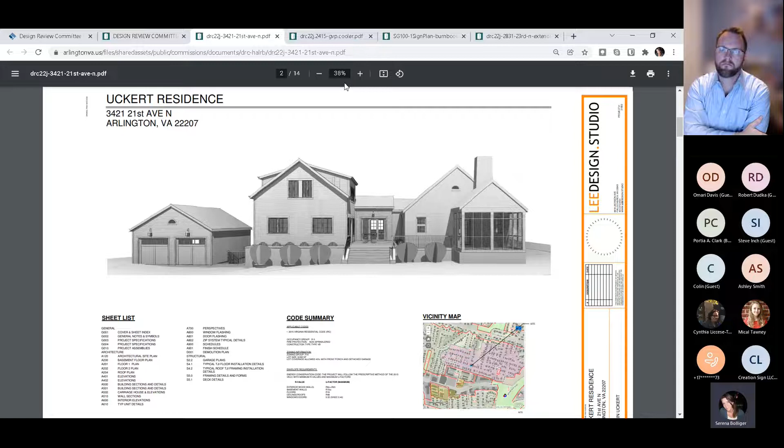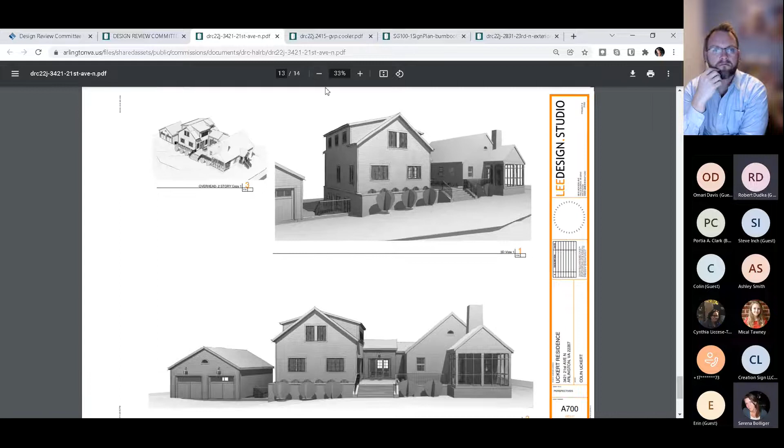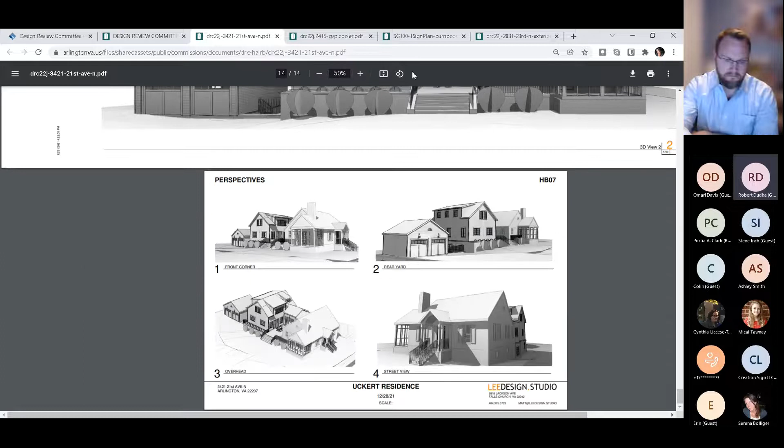And the applicant kindly submitted some additional renderings for me so we could see additional views from the street. Serena, can I ask something? Was this seen last month? It was, yes. Okay, so there's been discussion that I didn't participate in. So I guess maybe you can summarize briefly for me what happened last month.

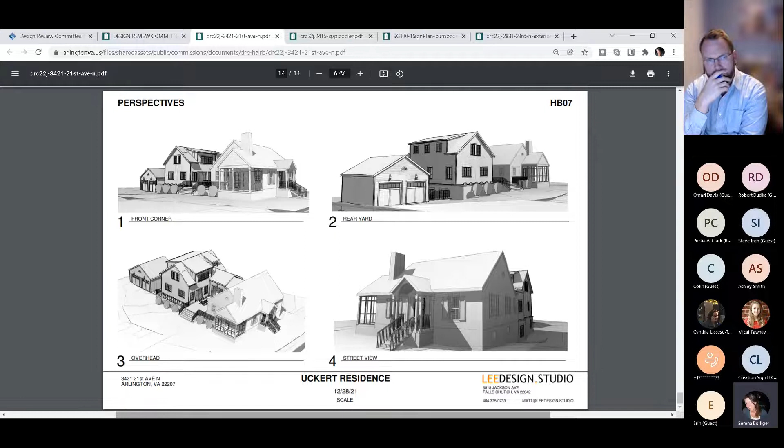In addition to your report. Yes, so this project has come in front of us more than once, and the applicant has been really receptive to feedback. They lowered the roof more than once, created this hyphen between the two buildings to separate the new from the old, and made sure that the roof line was not above the roof line of the historic property. Can someone mute themselves just so there's no echo? Perfect, thank you so much. And they added this garage in the rear and reduced the roof line twice, put in a half-moon window to mimic the half-moon window in the property, and also set it back so it would be a secondary building to the main structure. The staff report found the materials to be appropriate and the changes made over time to the property to be appropriate.

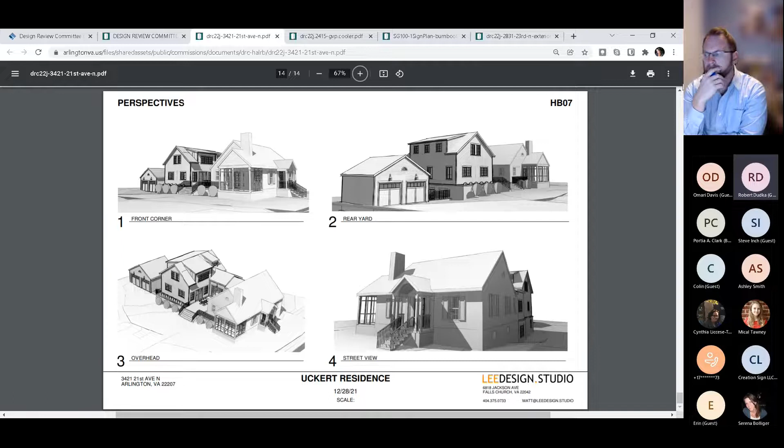As an addition to the historic structure. Do you have any additional questions for me? Is there anything I didn't cover? It was quite generic. Can you go back to where you scrolled through the drawings to the ones that showed the changes? Sure, let me.

So these are the plans for the garage. Right. And I can take us to the site plan so you can see how the size has been reduced. There was those ones where the colored, I assume that showed the, keep going.

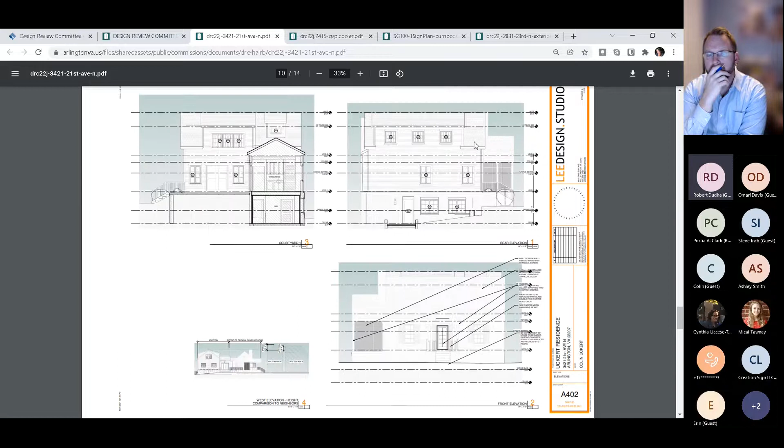So those are the parts of the original house that have been modified or demolished? Yeah, so that's an existing addition that is going to be removed. It's not part of the original house. It was an addition, I think in the 80s.

Do you want me to keep going through the drawings? No, I just wanted to see this sheet. Okay, that's it. Great, thank you.

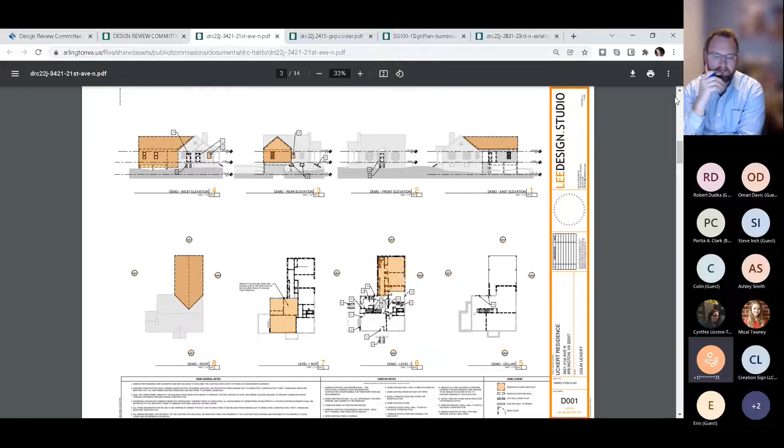I think some members of the board would have liked to have seen the garage move back further than that, but it was originally set by the applicant at the same setback line as the main addition to the house, the 1.5 story with a basement.

So I think 2 foot 4 could be a bit more, but I have one comment that I think would help. There's been railings used on the patio between the original house and the addition, and that is fine there. I think that's fairly light.

But I think it would perhaps emphasize the setback of the garage from the addition if, instead of a railing fence there and steps down, you change that railing to a picket fence, which would be fairly traditional and would read stronger than the light metal railing. So I think that would be one suggestion.

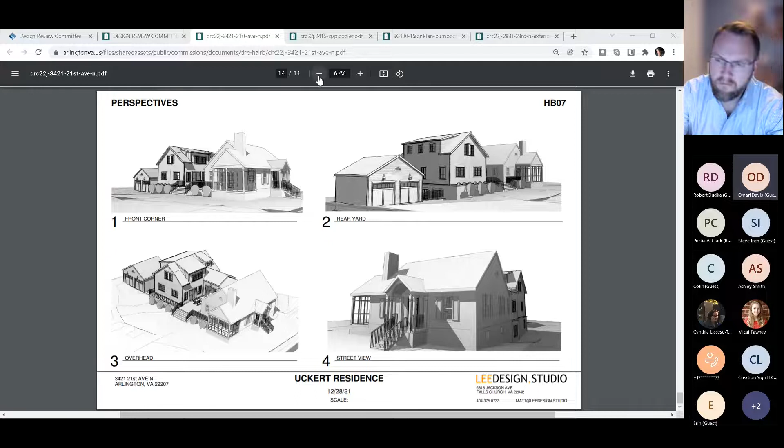I do see that there is some differentiation there now, but the way it's done, I almost wish the hyphen could... I'm not quite sure how to. Serena, could you advance to... yeah, there we go. So the hyphen kind of pops up above the gable coming from the existing house, and I kind of want it almost to be the case where the hyphen would be sort of the minor element in this elevation, such that you have the addition on one side and the existing house on the other side. The hyphen almost wants to be sort of the minor thing connecting these two major elements.

Again, it's really not a deal breaker from my point of view of the project at all, but that was something Commissioner Wenchel had mentioned. I thought that was a very good comment last time, to make that hyphen a more minor element, but that's my only comment on design. Again, I want to thank the applicant for their work thus far on the project.

So this is Robert. Thanks, Omari and Andy.

Did this go to the full board last month? Yes. And was the board generally supportive? Yes, they were very happy with the addition, including Joan, who's a neighbor. She's about two houses down Lincoln, since this is on the corner.

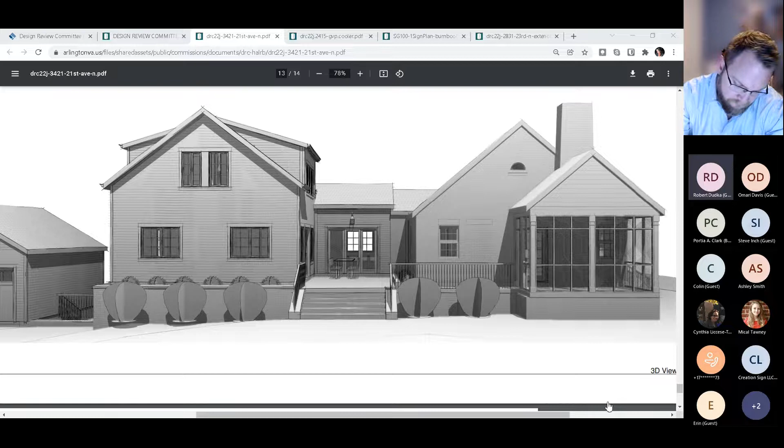So I think on the whole it's worth doing it this way. I also realize there's almost no yard on this property, so you can't push the garage any further back. It would have been great if there was somewhere to push the garage so it's not quite so far up front, but I know that can't happen.

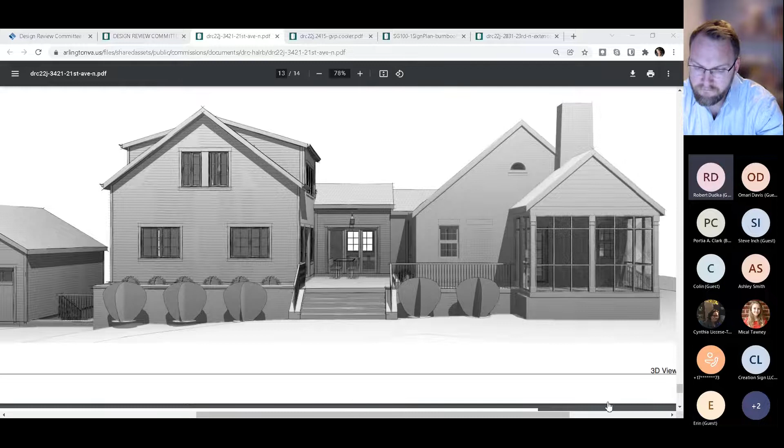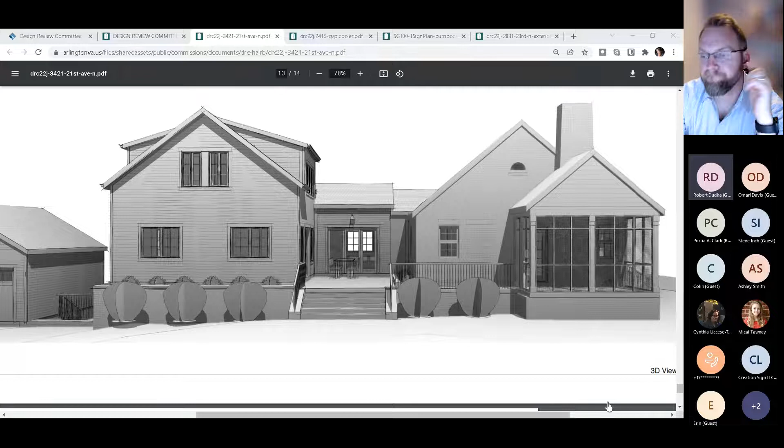I share Omari's concern about the link—if anything, you'd almost want it to go the other direction, where the link on the addition side is lower than on the house side. But I understand why it is that way. That's not a huge consideration for me.

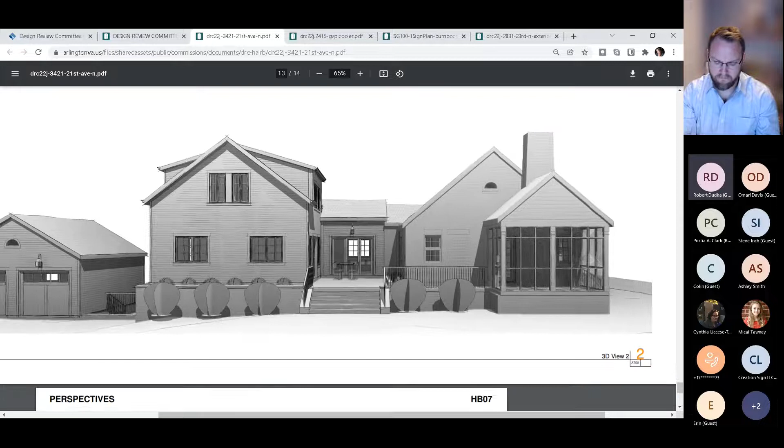Otherwise, I think the applicant has done a very good job with this, and I'd certainly support it.

Serena, is the intent to go to the board for final approval this month? Yes.

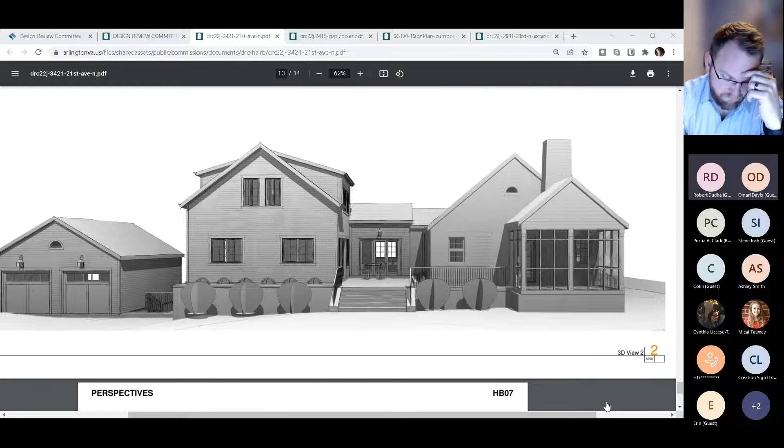So I guess the question is whether it's possible—I've now heard there were two of us who talked about the rail. I don't know if we all agree about that, but it seems like a relatively simple thing to change. I don't know if the applicant would be amenable to that or not, but if that was changed, I think I'd be okay with this.

Hey Matt, it's Colin. Do you want to address that, or would you like me to respond? I raised my hand to try to be polite, but Serena just didn't want to talk to me, I guess. So when I show my screen, I can see nothing. Sorry, all good. I'm very offended, Serena, but we'll let it pass this time.

Yeah, Colin, absolutely. So we've got two railings in this view. I agree if the one on the left, between the addition house and the garage, wanted to be more of a picket fence feel, that doesn't bother us. I think the one on the house, we're looking for some transparency there. Is that the one you're talking about, Mr. Dudka? Yeah, that's the one I'm talking about. The one between the garage and the addition should also be a wooden fence.

But the metal railing tends to—I know it does happen on houses of this vintage—but it probably wouldn't happen on a Sears house, is my sense. So I think I'd rather see it as a wood rail. What does the rest of the DRC think? I guess the other comment was actually about the link between the garage and the addition, not about the rail up on the house proper. So what do you other two guys think?

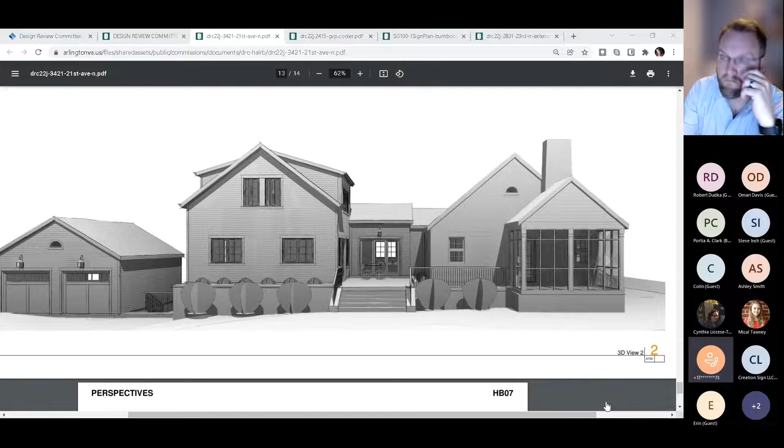Well, if I could jump in, Andy here. I think we hadn't really commented on the rail by the patio, between the addition and the original Sears house, which is raised up a bit. I agree with you that the Sears house would not normally have a metal rail. That was something somebody added later, sold to a homeowner—it wasn't part of the Sears built kit.

I think that's a reasonable request. It would give you a nice feel. I think the only argument for the metal railing is really the transparency, that you can see through it. My thought, if I can interject, is that a wood rail is going to require a post every 4 to 6 feet. It's going to be a lot chunkier, and I don't think it's going to be as attractive. It's more maintenance for our client. I think the metal rail is going to be something thinner, lighter, and the neighborhood's going to enjoy more than a chunky, pressure-treated, painted 2x4 rail.

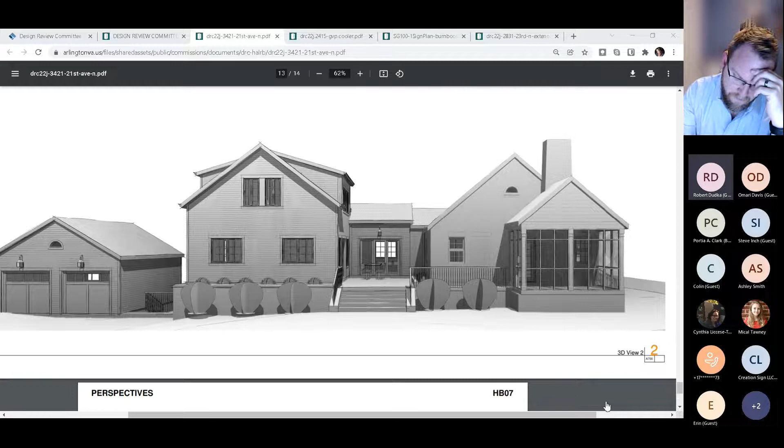No, it wouldn't be a 2x4 rail. It would be a Maywood approved rail, which is the more traditional rail, which is in the guidelines. There are details how to do that rail in the guidelines, and you see it all over Maywood. It's fairly typical.

Understood. So Omari, what do you think? I'm kind of willing to be on board with you, Nanny, on this one. I definitely hear the argument that the transparency of the metal makes it better for the viewer, so to speak. But I think as a uniformity thing with the neighbors and with Maywood in general, and with the Sears house, the wood would be more appropriate. I see both arguments, but I would fall to the side of having the wood railing, both between the garage and also up on the patio there as well.

Understood. That doesn't bother me. Can I ask for a clarification? So I thought the previous comments on the area between the garage and the addition were to have a picket fence. Is that the direction we're being guided, or do you want the same wooden railing there that you're now suggesting on the patio?

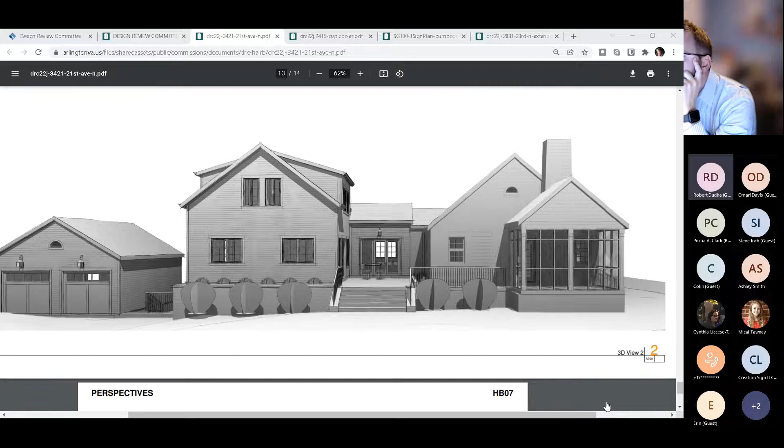No, the fence between the garage and the addition is a fence, and I think as long as you do one of the standard fence designs that exists in the guidelines, you're good to go on that, at least in my opinion. In fact, technically you don't need our approval for the specific fence you put in there, as long as it's one of the guideline approved fences, because essentially they're already approved. But the rail, between the original house and the addition, clearly does need our approval.

So I don't know how the whole board feels about this. You could always come in with an alternate, two alternates, one with the metal rail, one with the wood rail, and see what the board is willing to allow. We're 3 people out of however many we are now, 13 or so.

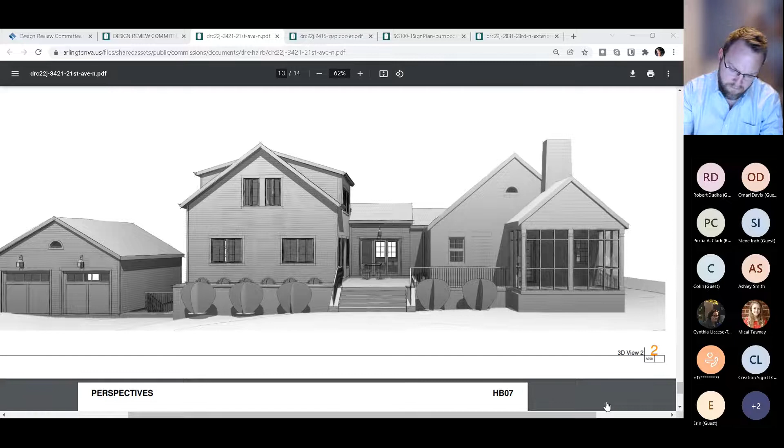My sense, just to summarize this, is that everybody's pretty happy with this, and we should kind of move it on to the board. I think we're just talking about the rail at this point, and you could easily show an option with the wood rail and one with the metal rail. If you can make your case to the board, and the board is okay with the metal rail, then I'm not going to be upset about that.

Okay, well, I appreciate the guidance. That's very helpful. Thank you. So does anybody else have any other comments, or are we good to move this forward to the board?

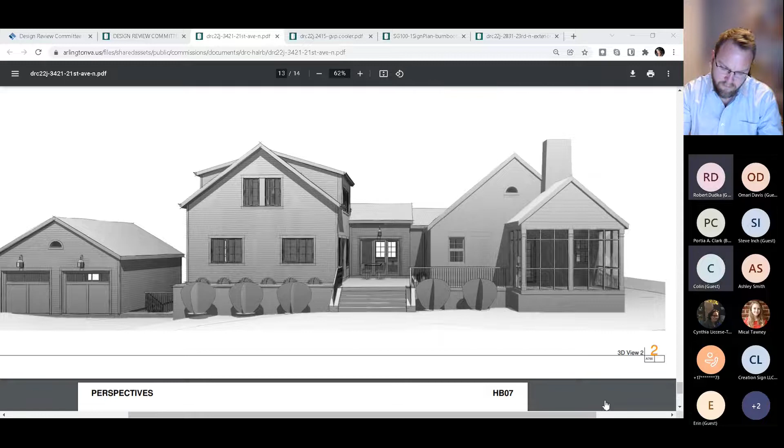I'm good to move it forward to the board. So you'd like to put this on the discussion agenda, Robert? Well, the board has already seen this. The only issue is the rail, we could couch it that they've done what the board has asked, and we're really just have this one minor issue, which we're doing as a favor to the applicant, because if the board is okay with the metal, then so be it. So I would suggest that it goes to discussion, but not to reopen. If all the other elements have already been discussed, then it should be limited to the changes that were made since the last board meeting.

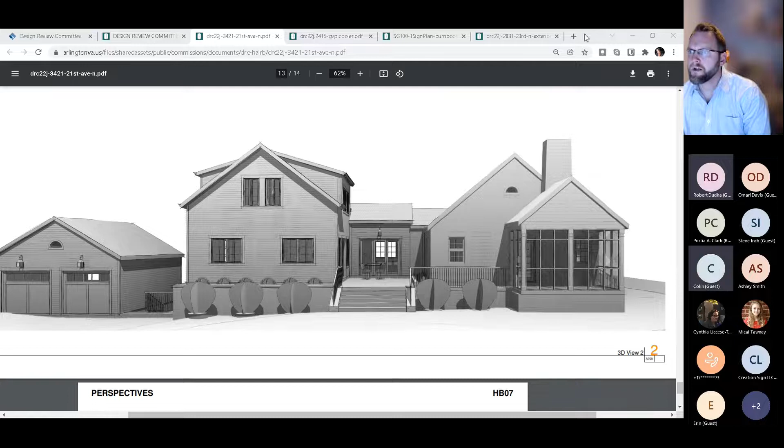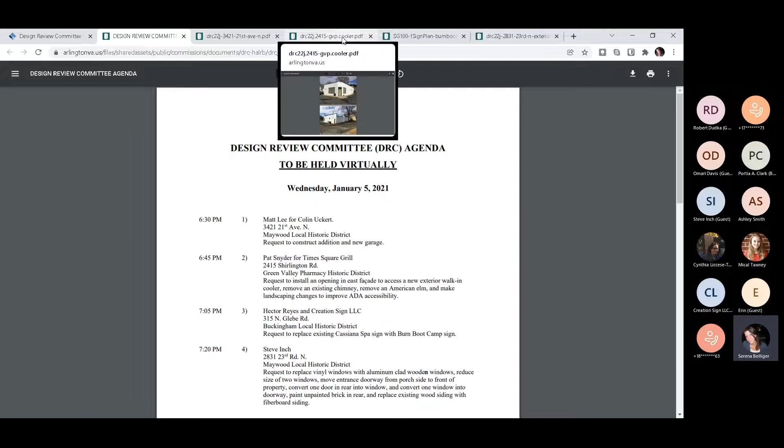The second item is the Green Valley Pharmacy. This is a request to install an opening in the east facade to access a new exterior walk-in cooler, remove an existing chimney, and make some landscaping changes to make the area ADA accessible for a restaurant to be inserted.

Originally, the removal of the American elm that you can see in this image was included, but actually that was approved for removal in 2018, along with the COA that approved the removal of the mansard roof. So that is not actually up for discussion.

So this would be just for the removal of this chimney that you can see, the addition of a cooler along that space, and the insertion of a doorway from the building into the cooler. Mr. Winchell, at the last meeting, before this was pulled from the HALRB agenda, asked if there was going to be a space in between the two, and there is an air gap between the building and the cooler, so they are not touching, they're not connected, but there will be a vacuum seal between the door and the cooler.

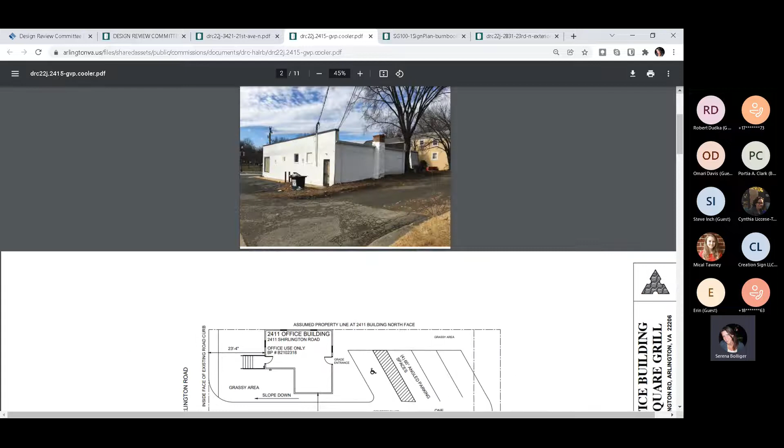And then, as you can see, the area is largely already paved, but this would be repaved for improved car access, and then a concrete dumpster pad would be poured in the rear to allow those dumpsters to be installed there.

It seems like with that chimney protruding the way it is, they're either going to build around the chimney or set the whole thing out. Are they asking to remove the base of the chimney? They're asking to remove it. It's no longer in use, and that's one of the items they're asking to remove. So we have that approved, okay, that's fine. That answers that question.

On the chimney, we had some discussion last time. First of all, I think you can't get the cooler that tight to the wall, so you end up with a place that is essentially a vermin area. Plus, you also get the problem of causing deterioration from lack of maintenance or sight of the rear wall, and the chimney would provide a reasonable offset. And you're taking one of the features of the historic structure, the chimney, which was part of the original building, and taking it off, which I think is regrettable.

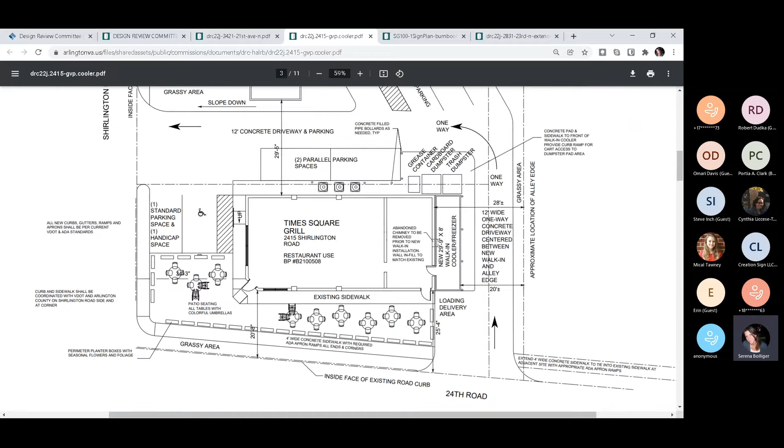Yes, absolutely. Okay, so you do not object to the idea of the cooler, especially if it were located next to the building, but without any effect to the building. So if it were placed... Yeah, I'm okay with it tight to the building as long as they build it around. They literally, I think, can jog it around the chimney if they have to.

They put these things in weird situations. I mean, maybe it depends on the manufacturer, of course. But I'm sure there's a way they could make this work without taking that chimney off. They should at least tell us what they can do.

Okay, I can ask the architect to explore those options and bring them back to us. Okay.

Omari, do you have any thoughts? Nothing, really nothing to add. Honestly, seeing it the first time, I thought it was kind of okay what they were proposing, but taking a second look at it prior to the meeting, and also listening to your and Annie's argument, I think that definitely makes sense to maintain the chimney, because the important thing you point out is that if the building in the future is no longer a restaurant, the chimney that was there will still be missing.

It'll still be the ghost of what used to be there. The building won't be there anymore. So I think it's important to maintain that chimney as an important feature of this very simple structure. I definitely agree with that. So I'm on board with everything.

Okay, alright. Okay, so if I give that feedback to the applicant and we see new drawings, are you okay to put it on discussion at least to look at it again at the HALRB meeting? It wouldn't come back to us.

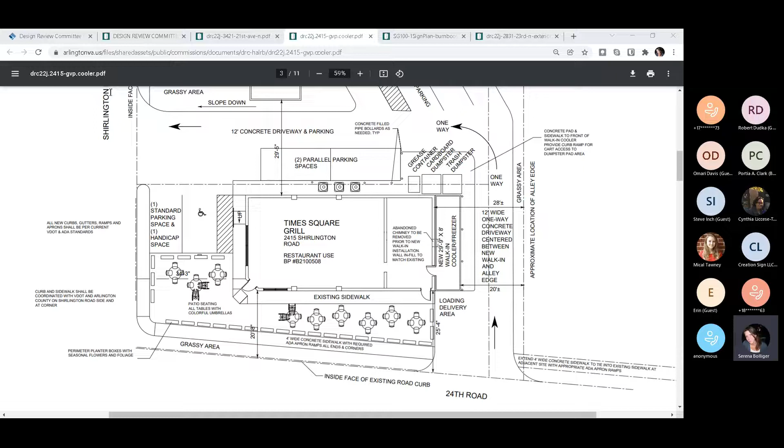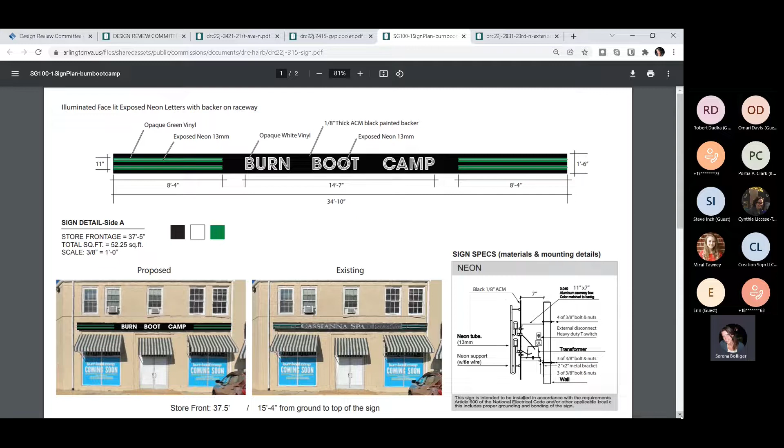Okay, so this is a sign in Buckingham, in the Cassianna Spa space, and it is Burn Boot Camp. They are applying for 2 signs, both on the front of the building. It's a corner building at the northernmost end of the shopping center, and this is a company that has submitted applications to us before. They did the T-Mobile sign that you approved most recently, and so this is what the 2 signs are. They have installed their signs with us before.

I believe the applicant is on the line with us, but do any of the commissioners have any questions? I have some, not questions, comments about the spacing of the letters.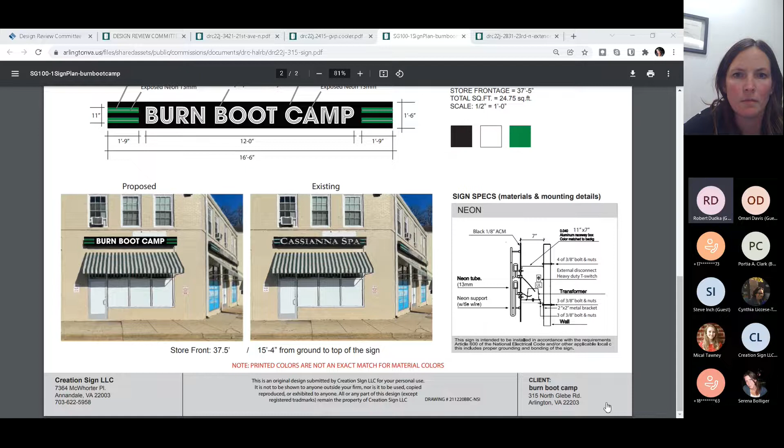On the one you have on the screen right now, this seems like a kerning issue. It seems like there's more space on the P side than on the B side, because the P kind of tucks back in. So usually that would just move over a smidgen.

And similarly, for Boot, there's more space between the T and the C, and then between the N and the B. So normally Boot would be moved over just a smidgen. They should have their graphics guy take a look at that. It's just a tiny refinement, and I kind of feel like what should happen is that Burn and Camp should come in just a hair towards Boot.

It seems like it's spread out too much to make it fit. Burn and camp are pushed too far towards the green lines, but that's just how I'm seeing it. And then the other one, on the other sheet, is really weird because it's so spread out that I don't know if they can move the words closer together and put some white rectangles at the ends to fill up the space. It just looks weird with all that space between the words to me.

What do you get? What do Omari and Andy think? Yeah, for me, the longer sign has maybe too much space between burn and boot and boot and camp. The one around the corner I hadn't quite noticed, but I'd say the one that bothers me more is the longer sign.

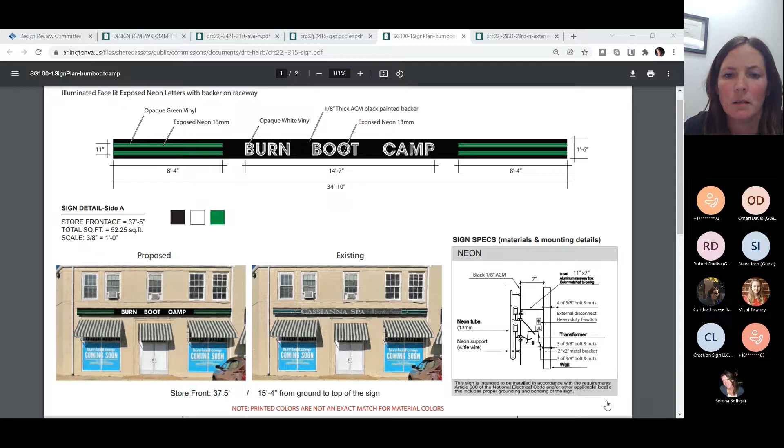You're not required to. It has historically been there, but you could, in this application, ask to remove it rather than having it. Okay, because I asked our property manager and he said I needed to get approval from you guys.

So then, commission members, how do you feel about the removal of this? Yeah, not even worrying about the little sign at all. Well, it's sort of an interesting question, because presumably we are being asked to approve the removal of the Cassianna Spa sign to start off with, and then we're being asked to approve something else to replace it, right?

So on the side that faces the parking, that sign would be replaced. They're using the existing box, so it would not really be the replacement of the sign. It's just a change of the neon. The box itself is remaining. However, they are asking about the general feelings about removal of this smaller sign.

Oh, you mean take it off the building altogether? I believe that's what they're asking, yes. Correct, just this one. I'd have to see the rest. Aren't they over all the windows? Yes.

Yeah, I think that would be the reason not to do it. But it could be just blank, I guess. It doesn't have to say burn boot camp. Blank light box, like the black box.

I could just have the two little green lines, or you could put two green lines in there just to fill it in, but not put burn boot camp in there, if they were trying to steer people towards the front with their signage.

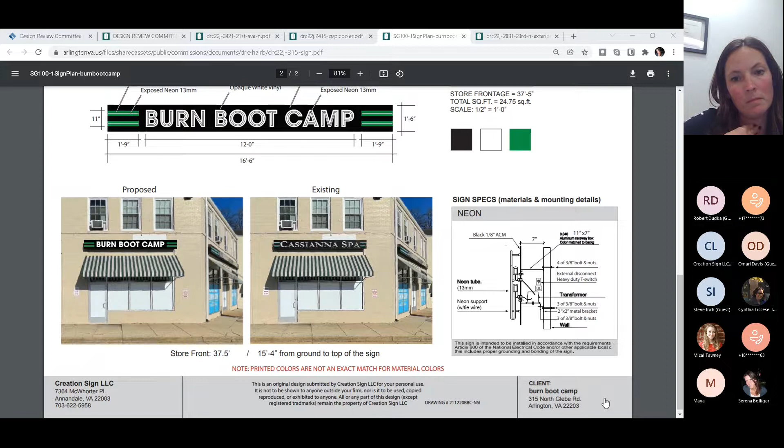Yes, it does to me. Is that feasible in the next week to get those drawings back to us, or do you want more time? No, that's definitely possible. I will come up with a few options and you guys can choose. I'm not guaranteeing it's possible the board may not like any of them, but based on what we've talked about tonight, there's a pretty good chance we'll be able to just pick something and approve it.

Great, okay, thank you. So I will send you some of that feedback via email, and you can let me know if you have any additional questions. But I'll plan to put this on the discussion agenda.

Yeah, I hate that we're putting so many on the discussion agenda, because the whole point of what we've been doing is to try to keep things off of the discussion agenda, but it takes a lot of time in the main meeting. But if they're in a hurry and need to get this done, then I guess it's okay, if they can't wait a month, I guess is what I'm getting at.

To come back to DRC. I'm not sure of the applicant's timeline. I was trying to make it expedient for everyone.

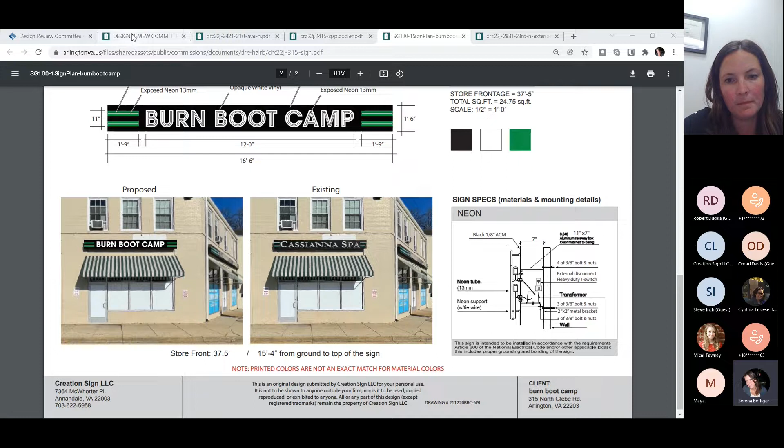Thank you all. I'm going to move on to the fourth item on our agenda, in the Maywood Local Historic District, 2831 23rd Road North. This is a request for an entire building renovation, including replacing the vinyl windows with clad windows, reducing the size of 2 current openings, moving the front entrance doorway from the porch side to the front of the property, converting a rear doorway into a window and a different window into a doorway, painting some brick, and replacing the siding with fiberboard siding.

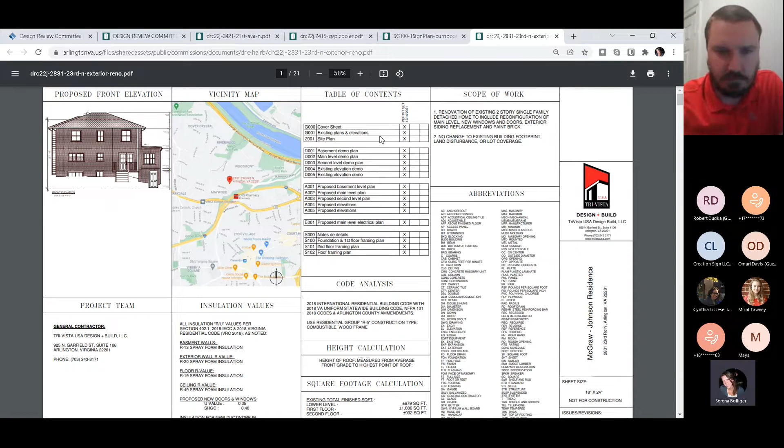Mr. Inch, are you on the line? I am. I wanted to confirm that the windows you're planning to put in are wood-clad windows. Correct? Okay, thank you.

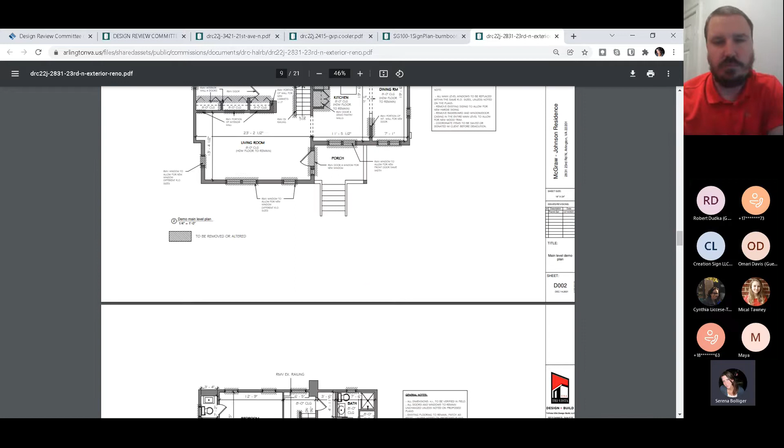Now we'll go to some of our elevations. These are the proposed elevations, and we have elevations with the demolition information on them.

I wanted to confirm that the brick you're painting has already been painted. It is painted, correct. So the brick is only on the front facade, and it is currently painted. We'll be repainting. That's fine, so that's not unpainted brick. I thought there was some on the rear that hadn't been painted.

We've never allowed wood-clad windows, but we've also not reviewed non-contributing properties that have come to us with vinyl windows wanting to change them out. This is a fairly unique situation in Maywood, so it'll be interesting to discuss what precedent this sets.

I did want to ask you, while I have you, about the change in size of the two windows that need to change in order to shift things on the interior. Can you talk us through those?

So like you mentioned, the main project is on the interior of the home. We're reorganizing the first floor to give the family a much more usable, beautiful space. The kitchen is going to shift to the front of the house, so the countertop height is actually dictating the height of those windows on the front. There's three total, well, two - a double window and another window - where the sill is going to raise up, but the top header will stay the same height, consistent with all of the doors and windows on the first level.

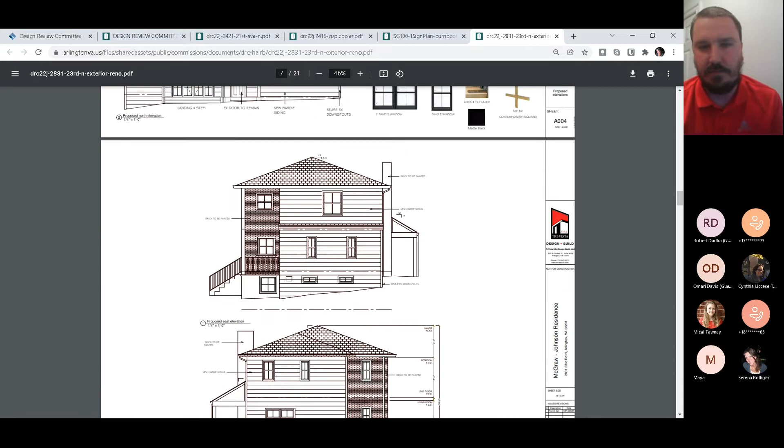And that's actually what's dictating the repaint of the brick on the front facade, which we discussed. This front facade - not only is it a non-contributing property, but the exterior of this home has piecemeal vinyl siding on both the sides and the rear. At some point there were modifications to openings, and whoever did it cheaped out on the vinyl and just did patchwork. So what we're doing is the back and the two sides of the home are going to get beautiful Hardie siding, and then the front - the reason for the paint is for the window, because we're going to patch the masonry in and then repaint everything, so the whole package is nice and uniform.

And Steve, this is Trace Johnson, the homeowner. If I could just interject one comment - the facade was previously beige up until the time we purchased it in 2015. So much so that when I checked my home on Google Maps in the last year or two, it was showing a brown or beige front brick facade that was then painted navy blue, given a fresh paint job, and they updated the staircase just before we purchased it in 2015.

This is Robert, can I interject here? If the brick has already been painted, HALRB doesn't have any jurisdiction over the color, so you're free to repaint however you'd like. I don't think we need to even review the painting of the brick if it's already been painted. As long as there's no new brick, or brick that hasn't been painted, that's not really on the table, I don't think.

Correct. So this is just a review of the conversion of the vinyl to clad windows, the reduction in size of those windows in the kitchen, and the conversion of those openings in the rear, plus the addition of the fiberboard siding, and the movement of the front door opening into that space.

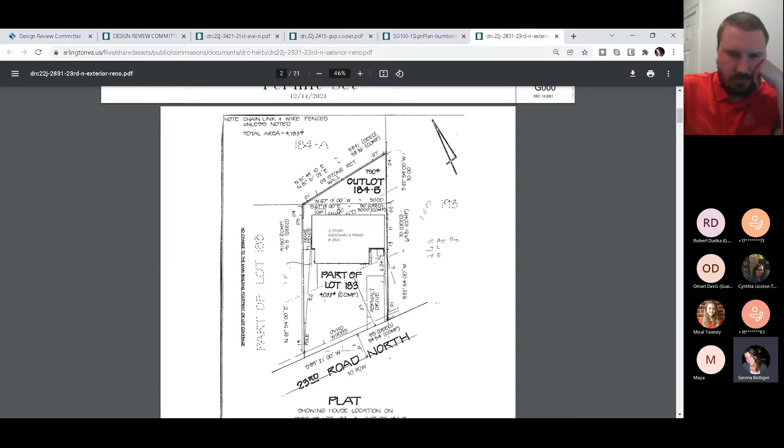No, I know that, but I don't think that's the issue. It could be, but I think we all agree this is non-contributing, that it's been so changed that it's no longer a contributing structure. So the question is, are you allowed under the current guidelines or previous precedent to install clad windows to replace vinyl windows in a non-contributing structure?

I don't know the answer to that, but it seems like a pretty simple thing to research. Because if it has been done, then there's precedent. If it hasn't been done, the board would be setting new precedent, and that's something that would need to be discussed by the full board.

Okay, I can certainly do that research and include it in the staff report. Personally, I don't have any problems with the changes in the opening, so for me that's the only issue. I don't know about Andy and Omari, but that's my only issue. Could I interject?

I think I have a suggestion. One of the things that's nice about the house is the hip roof, which, given the house and its history, I think is quite appropriate, and it would be quite different without it. In that vein, the addition on the east side has an almost flat shed roof. I think that would be drastically improved if they did the same thing as on the west side, where there's another little hip roof for that addition, which may have been the original part of the house. In any case, it fits, and if you put a hip roof over it with the top at the windowsill, you shouldn't have any real problems. I think it would drastically improve the looks of the house and make it more harmonious.